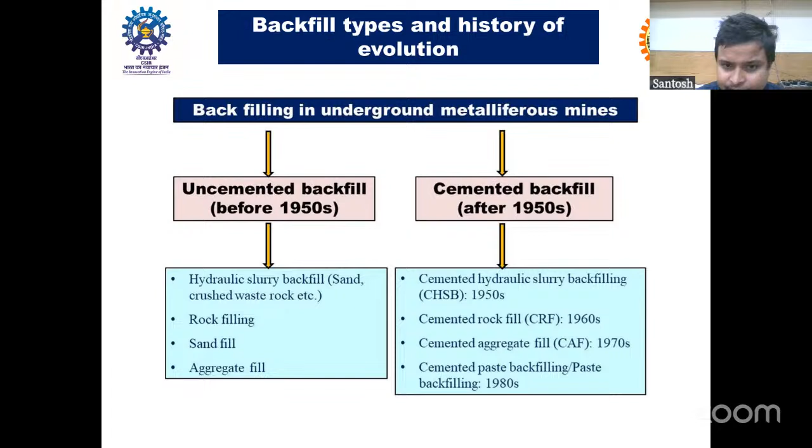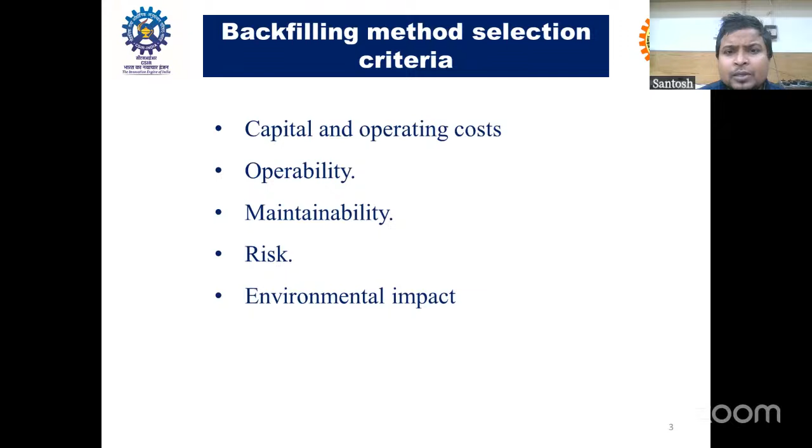So how do we select the best backfilling method for underground metal mining? It depends on the production requirement, what kind of cost the mine owner is going to bear in capital investment and operating cost, the level of operation needed in the underground mine environment, the maintenance, up to what extent they can maintain their best operation, and also the risks associated. The risk means the technical, financial, and environmental risk associated with backfill operation, and then the environmental impact. Considering all those parameters, the best suited backfill method is decided.

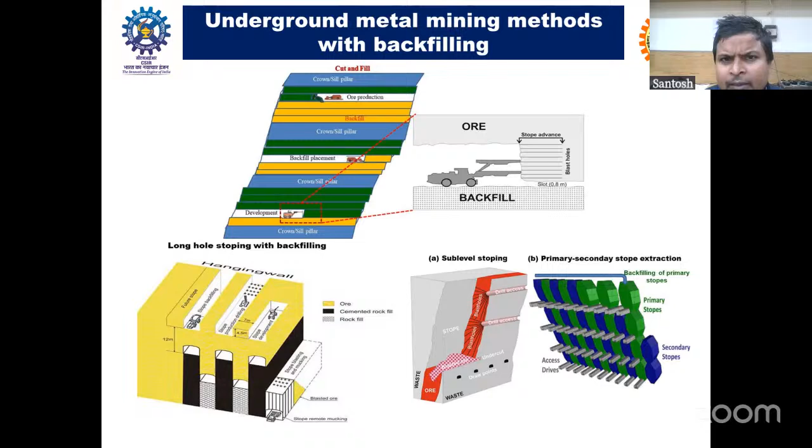And now there are plenty of advancements to completely extract the ore even without leaving any crown pillar. Even the crown pillar is to be replaced with cemented backfill. So this is just about the benefits backfilling provides to the underground mining industry.

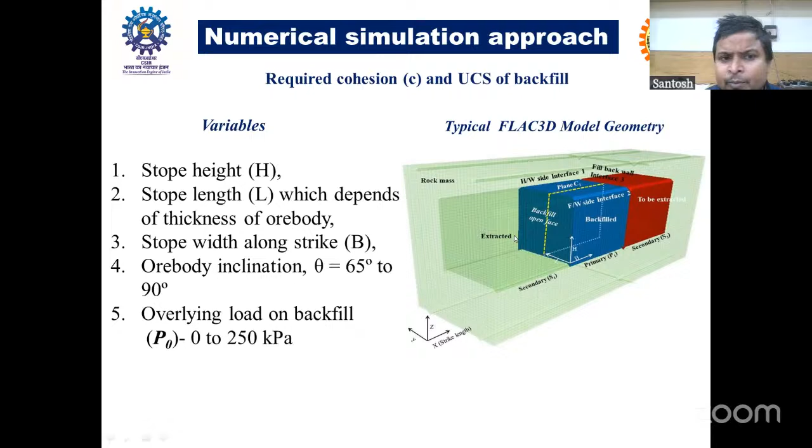So these are the different studies we do to determine the required strength so that the backfill mass remains stable. This is a case for sublevel stoping with paste filling. I will not explain in detail what kind of studies we do. This is just a simple illustration where we use numerical modeling techniques to determine the design strength for the backfill stope. These are the various findings of the numerical modeling. So all those things we do.

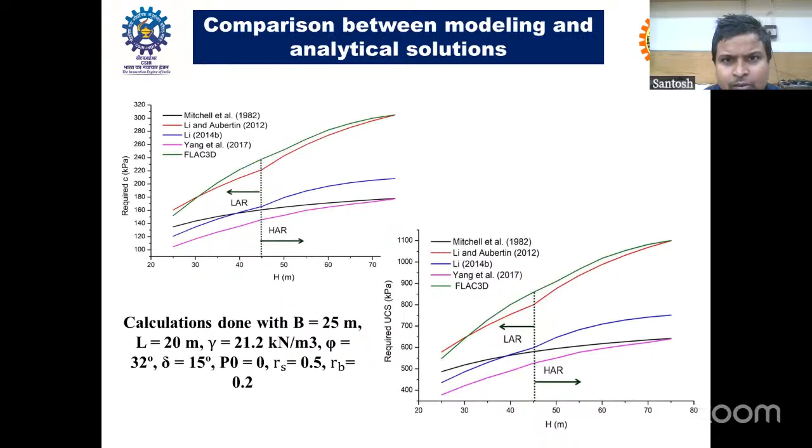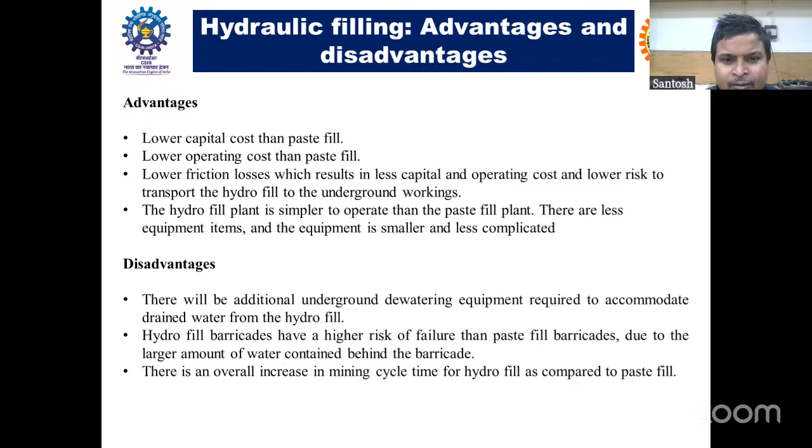And if you ask any mine manager what you need, hydrofill or paste fill, the mine manager will say straight away, I need paste fill, because of all the merits paste fill will provide.

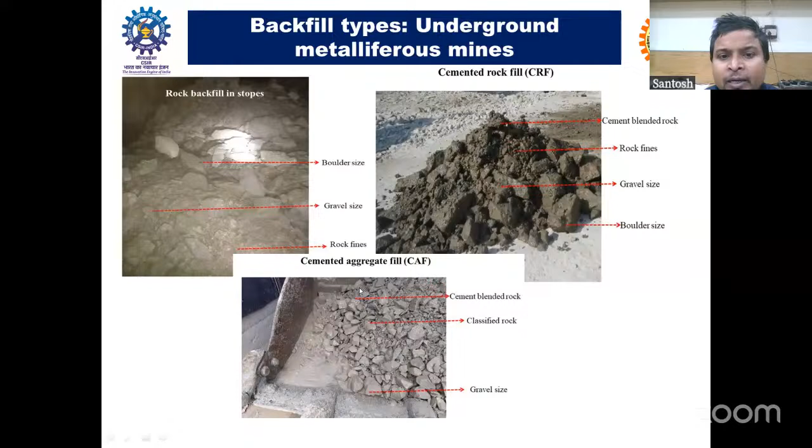At the bottom level it is open, so a barricade, a retaining wall kind of thing, is constructed so that the entire material is contained within the stope and there is no leakage through the barricade. The purpose of the barricade is to retain the whole material within the stope. The height of the stope varies mine to mine; in some mines it may be 25, 30, even 50 meters. It depends upon the site requirement.

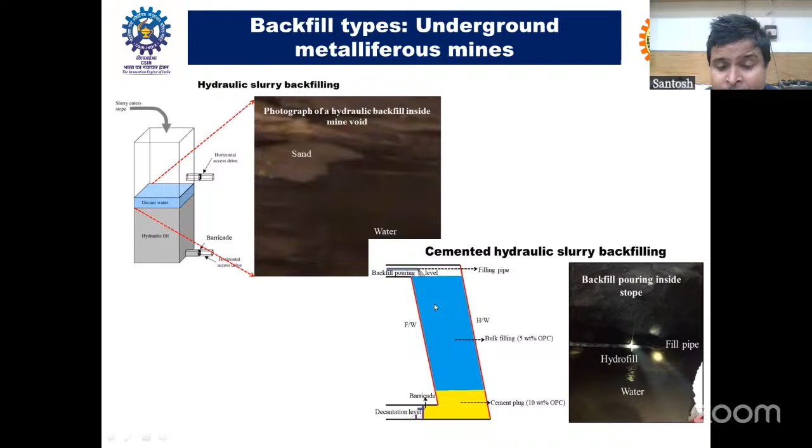Normally, in the bottommost portion, say up to 7-meter height, a backfill plug is constructed. Plug means relatively higher cement backfill mass, and above that, relatively lower cement backfill is poured. The purpose of the plug is to sustain the entire overlying load of the backfill. As it has higher cement content, there is less chance of fill mass failure and leakage through the barricade, even after the barricade fails. Once the backfill plug is properly constructed, the chance of backfill mass failure is negligible.

This is an example of how paste fill is prepared in a paste plant. Normally a surface plant is used for paste preparation. In that plant, classified mill tailings are used, then cement and water are added. Depending upon the requirement and design, the paste is prepared and transported underground through boreholes from surface to underground. From there, using a reticulated pipeline network system, the paste is poured into the stopes as required. This is the overall process of backfilling.

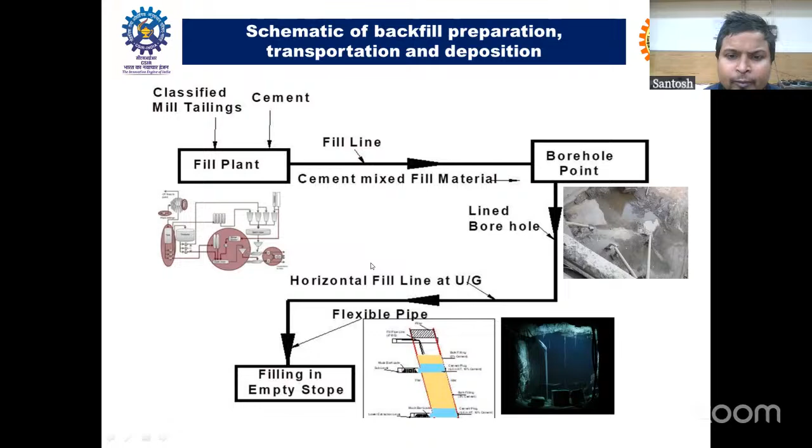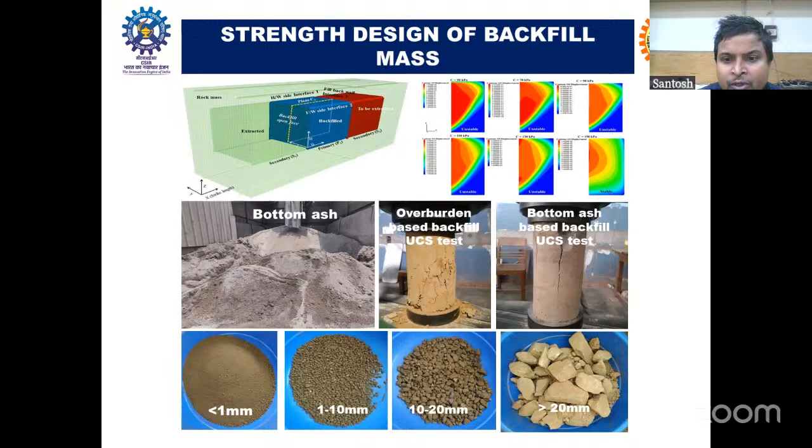These are different studies we use particularly for hydraulic filling or cemented aggregate filling. Different materials are used depending upon the site requirement and availability. Earlier I was showing tailings. Now this is about waste mass and overburden, and classified overburden of different sizes: the finer fraction, less than 10 mm, can be used for hydraulic filling, and the coarser fraction, more than 20 mm, can be used for cemented aggregate filling.

If we are doing hydraulic filling, the main objective is that the material should attain sufficient strength, and at the same time should not remain in slurry form for a long period. Whatever water you add to the underground stopes should come out through the decantation pipes. These are the laboratory setups; we physically simulate those things at lab scale before suggesting any backfill material for hydraulic filling and underground stope filling.

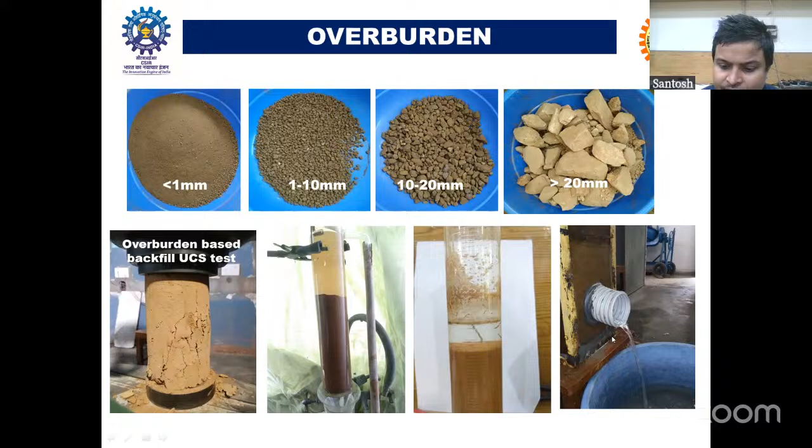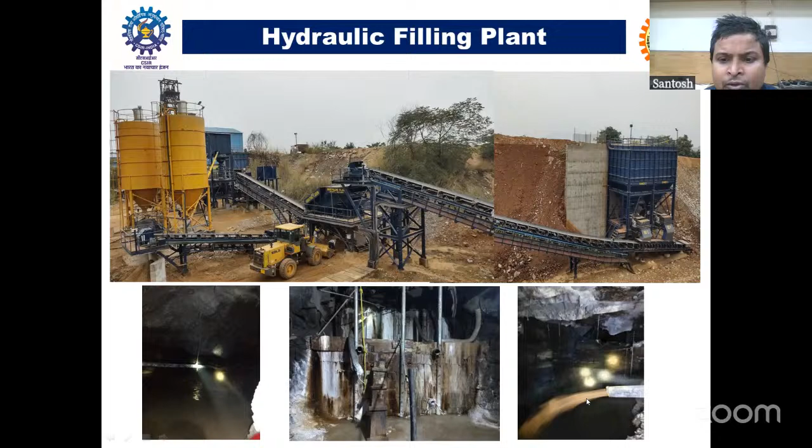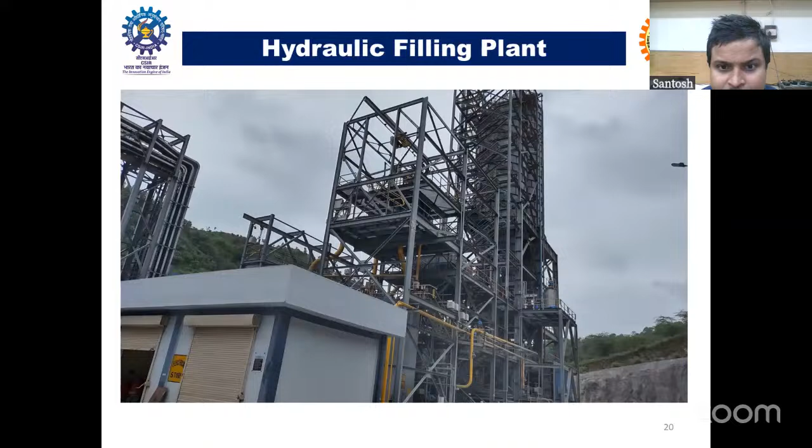This is a hydraulic filling plant of a mine site. At the top you can see the hydraulic filling plant, and at the bottom the backfill barricades and how the pouring is done in the underground stopes. This is one of the most advanced hydrofill plants of Hindustan Zinc Limited, which uses tailings, cement, and water. In this plant, the solid fraction is almost 70%. It's a high concentration hydrofilling plant.

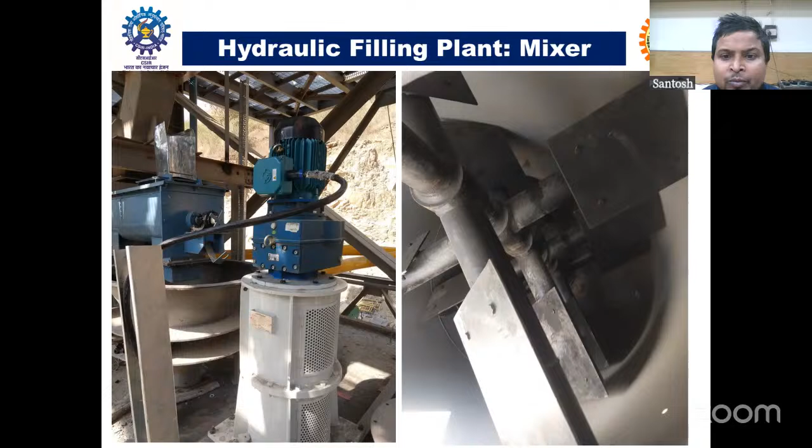There are various components which are used in hydrofill plants. So far as the tailings is concerned, agitators are used in tailings-based hydrofill plants, and the mixer is somewhat like a vertical mixer. In hydraulic plants, the pump is normally a centrifugal pump. This is also one old hydrofill plant of a mine.

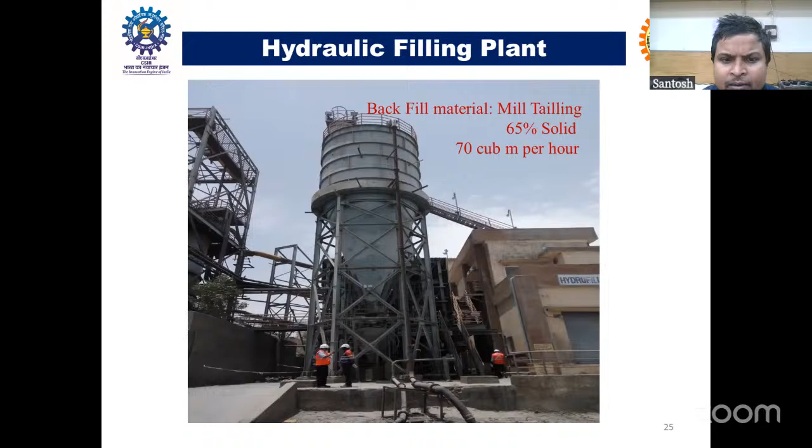As we are talking about hydrofill, the barricade should be properly designed so that the backfill mass is retained within the stope. Various factors need to be considered, like the loading mechanics on the backfill barricade, and the strength of the barricade. Based on the load acting on the barricade, the required strength of the barricade is determined, and the backfill barricade is designed accordingly.

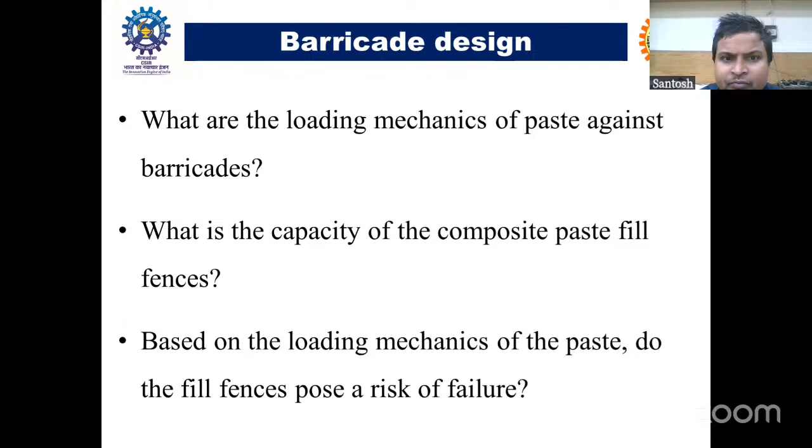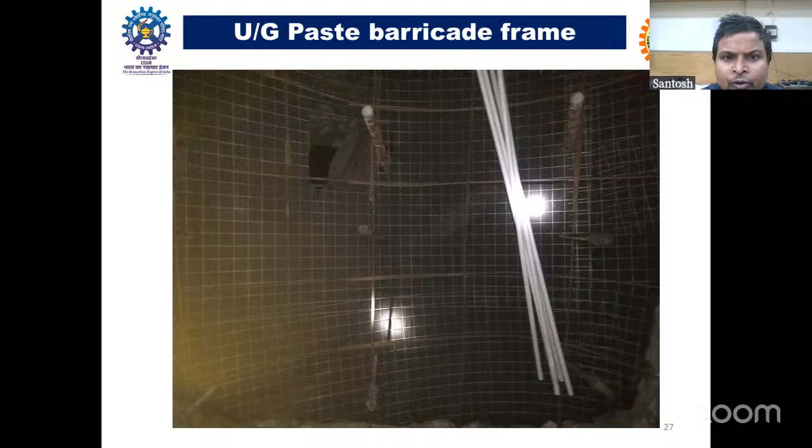So this is a reinforced composite shotcrete backfill barricade construction, which is under construction - just a photograph. There are different backfill barricades that can be constructed, like a shotcrete composite barricade, or simply a brick-based structure, or a wooden structure, depending on the site requirement.

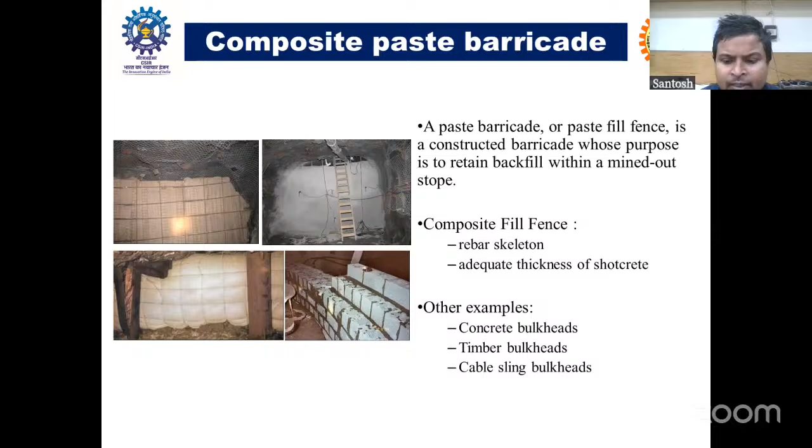What is the benefit of creating a stronger barricade? It means you can increase the fill pouring rate, and continuously pour paste fill or backfill. Also, you can use wider stopes, which means producing more ore at a time, and this definitely adds safety to underground working. You can continuously fill it, and the risk of failure of the barricade is minimized.

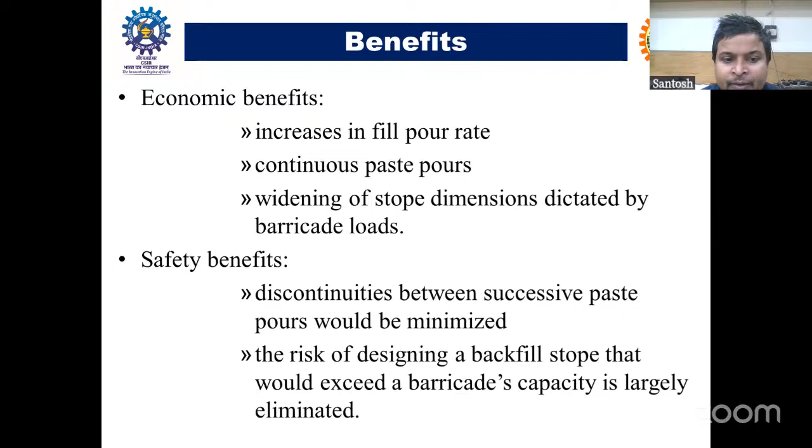This is one more figure of wooden plank barricades. And this is what I was telling about - various decantation pipes, which are erected from the upper level to the lower level, so that whatever water is inside the stope comes out through these decantation pipes, and the water level is minimized in the underground stopes.

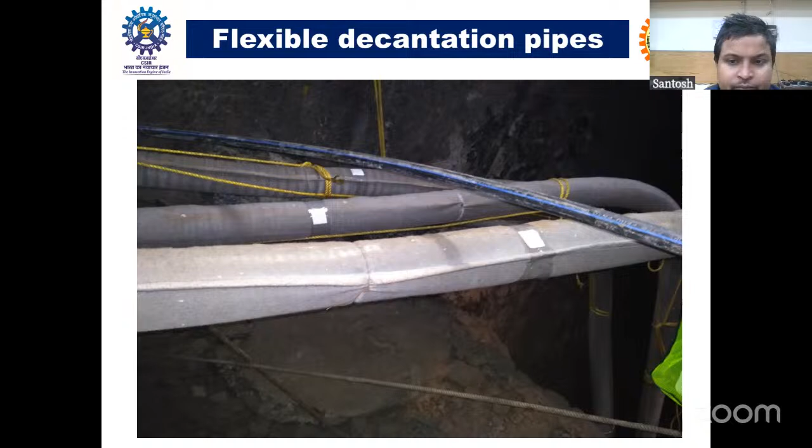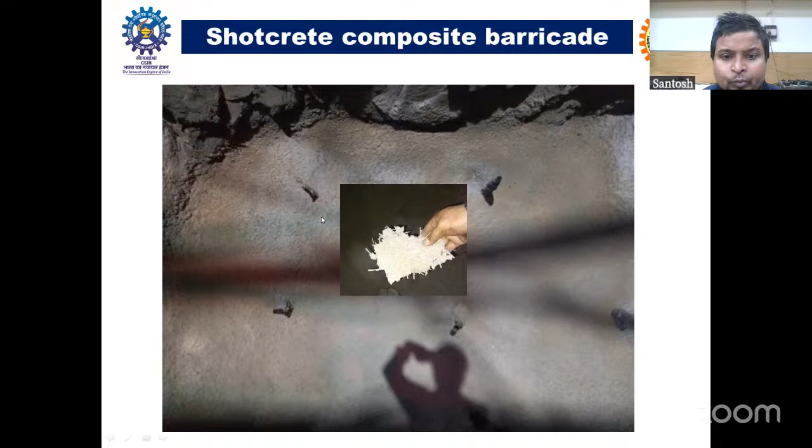This is one photograph of another type of barricade. Earlier, I showed a wooden barricade. Now, this is one of the most advanced barricade constructions, like reinforced double layer, reinforced shotcrete, and also fiber-reinforced shotcrete composite barricade. You can also see many drainage pipes which are kept to drain the additional water present in the stope.

Earlier I was explaining briefly about cemented rock fill, cemented aggregate fill, rock fill, and hydrofill. Now coming to paste fill - if I compare hydrofill and paste fill, paste fill consists of high solid content, whereas hydrofill consists of lower solid content. High solid content in paste fill means up to 80% solid, whereas hydrofill means low solid, maybe up to 50 or 60% solid.

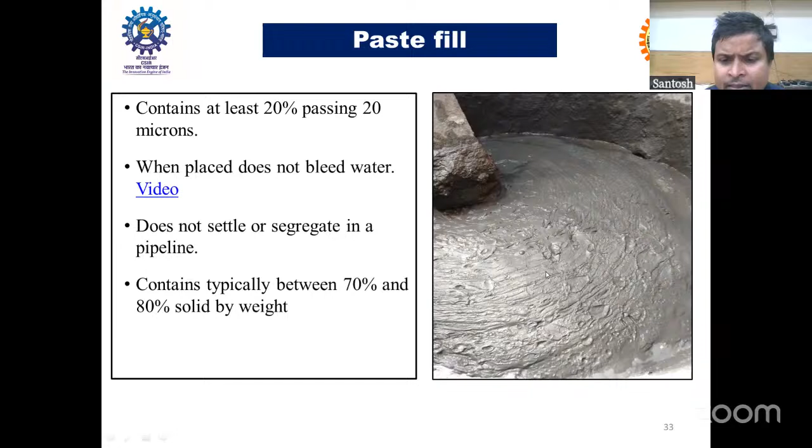Now, why is paste fill required? Though the industry was using hydraulic filling and cemented hydraulic filling, there was a need for industry to improve and increase production, increase safety, and dispose of tailings generated from the mill in a large volume. Considering these issues, and the n number of limitations of hydraulic filling, there was also the requirement that the voids created by stopes need to be backfilled quickly - meaning a high rate of backfilling is required, especially when extracting below important surface features. Considering all those requirements, people started using paste filling.

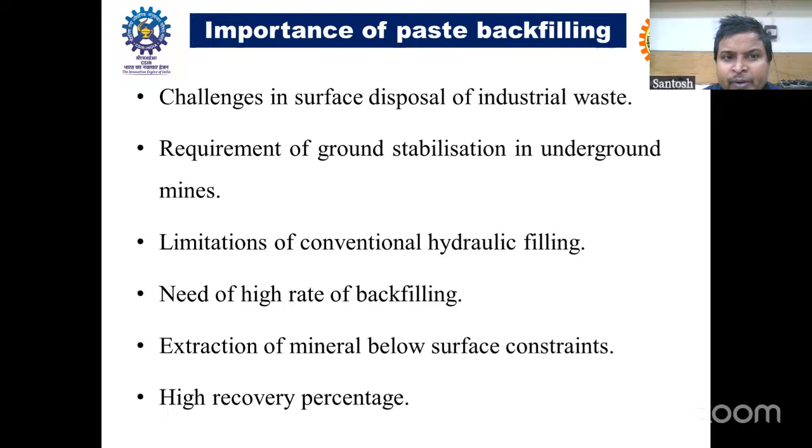The advantages you can quickly see are a minimization in handling additional water, and better quality of fill than hydro-fill. Quality means in terms of strength, in terms of dilution, and also reduction in mining cycle. For example, in hydraulic filling, the entire stope filling process may need say 30 days for filling a single stope. If you're using paste filling, the same stope can be filled within 10 to 15 days. So straightaway you are reducing the mining cycle by 50%. It also prevents possible liquefaction, and paste fill creates less pressure on the backfill barricades.

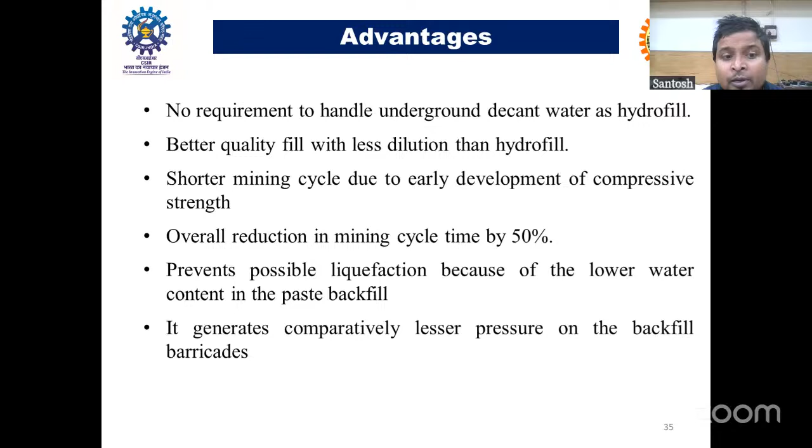So what are the various materials, particularly for underground metal mines, that can be used for paste fill preparation? This is a study we did by mixing mill tailings, fly ash, crushed slag, and cement, along with various laboratory studies we did in CIMFR, including scanning electron microscopy (SEM) study of the tailings, fly ash, and other materials.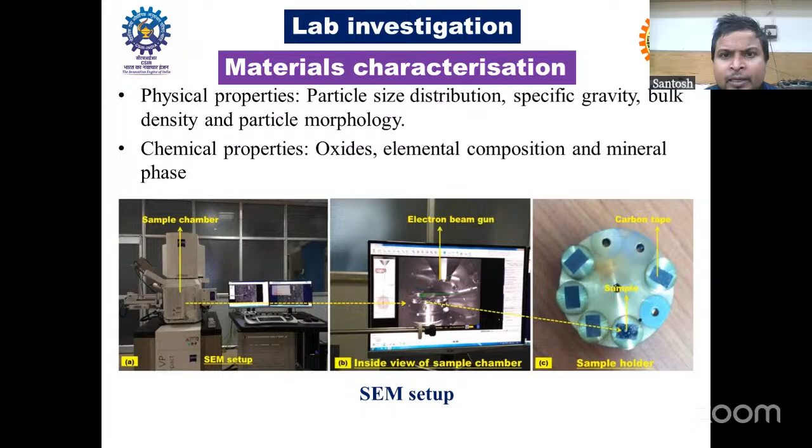So there is a role of chemical composition on the backfill strength. If we have a higher proportion of CaO, SiO2, and MgO and others, the strength is better. Whereas with SO3, a higher proportion may create a negative impact on the strength in the long run.

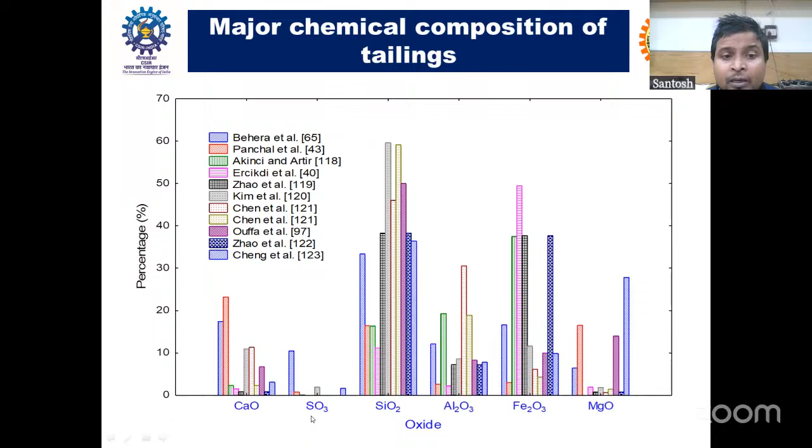There are different studies we do, like comparing hydration index and lime saturation factor. One study we did was for a particular mine that was earlier using cement as a complete binder. Normally in backfilling application, if you simply use cement as the sole binder, you are spending more, and backfilling is itself a costly affair, of which 75% is the binder cost. So the target was to reduce the backfill cost and use alternate binders so that cement can be replaced.

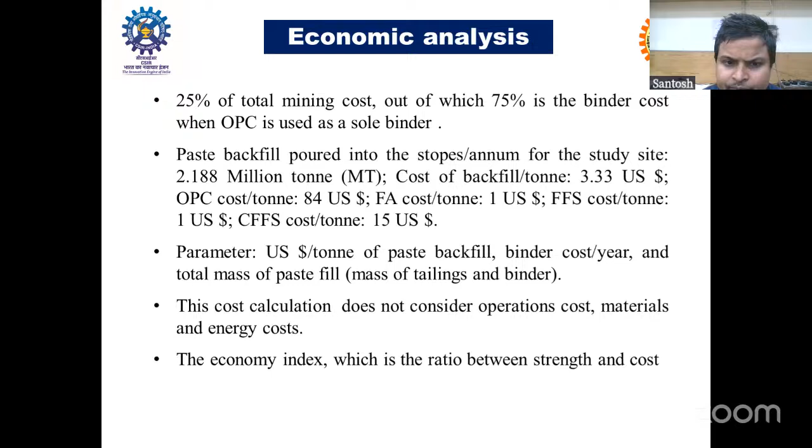Similar to concrete in civil engineering, people are using alternate binders like GGBFS, fly ash, and other natural and artificial pozzolana. The same applies to paste fill. We found that when replacing cement by just 1 to 2%, we are saving crores of rupees on an annual basis. This is one of that study.

Imagine that a strong backfill structure has been created underground. Unless you create a strong backfill structure, you cannot extract a core from that backfill mass. So if you are able to extract a core, that means the backfill mass has attained sufficient strength. The purpose of this core extraction is to determine the strength parameters of the cured backfill in the underground environment. This is one kind of study we have done for many mines.

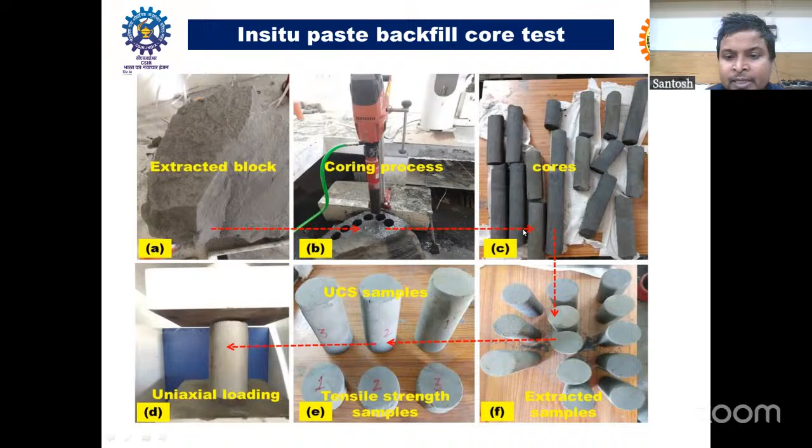Here is another part where we have extracted a block of backfill mass - this is a backfill block, not a rock. In the lab we extracted cores, and you can see the cores. It looks like rock cores, but it's actually cured paste fill cores. We then determine various properties like UCS, tensile strength, Young's modulus, and Poisson's ratio.

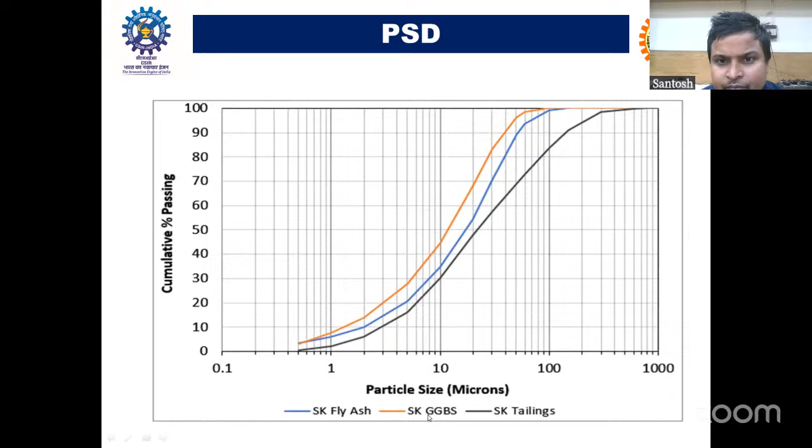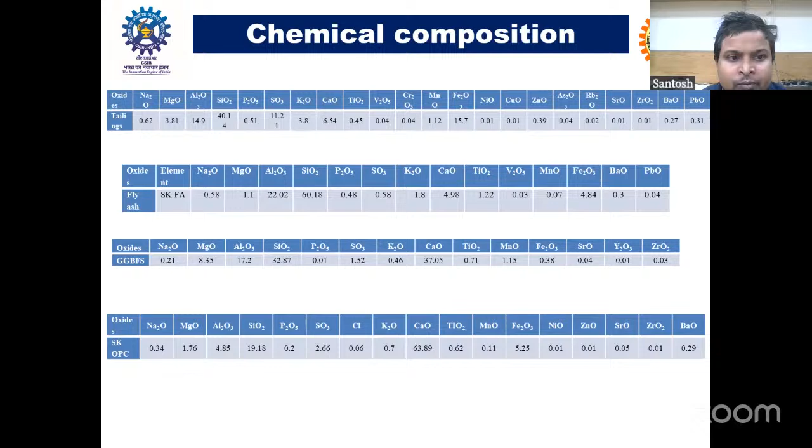There is one more study we did, replacing cement with fly ash and GGBFS (ground granulated blast furnace slag). These are the various properties of the material used, like tailings, fly ash, and GGBFS.

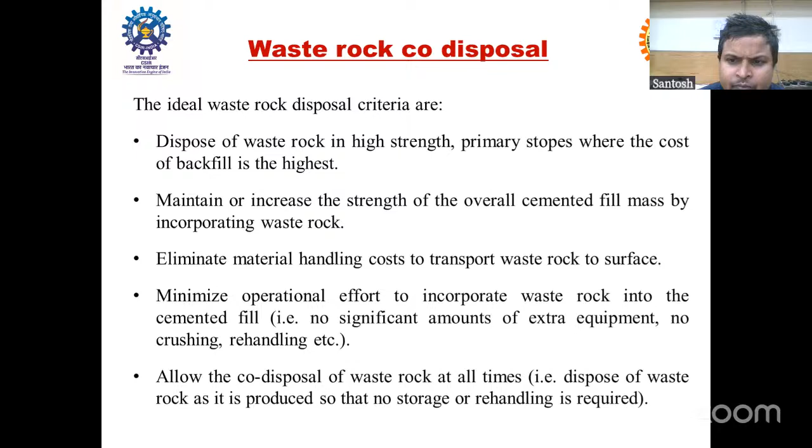One more recent development is people thinking about using paste fill in conjunction with waste rock in a single stope. This is another part we are working on - how best both things can be accommodated in a single stope, paste fill and waste rock at the same time. This can be done for some portion of the mine, not at a complete level. This is all about waste rock co disposal.

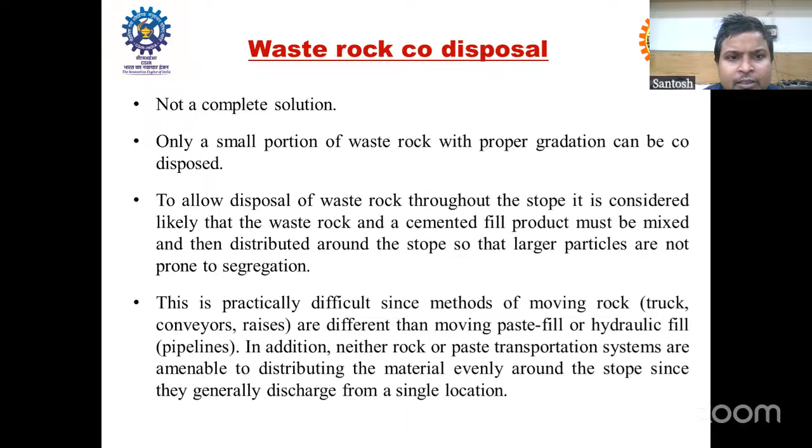Okay, I have just quickly gone through because I have completed my slides. I will summarize whatever I have explained. Quickly, I have explained different underground backfilling methods which are being used. All these methods are used in India and in various underground mines of Hindustan Zinc Limited, Indian Metal and Ferroalloys, Hindustan Copper, Uranium Corporation of India Limited (UCIL), then MOIL.

And also Indian Metal and Ferroalloys, as I already told, and Odisha Mining Corporation, people will be using paste fill. So I have summarized different methods of backfilling, starting from uncemented to cemented backfilling, and also in the cemented backfilling category we have different options like cemented rock fill, cemented aggregate fill, cemented hydraulic fill, and paste fill. I have also differentiated rock fill, CRF (cemented rock fill), and cemented aggregate fill.

Then I quickly explained the process for doing cemented hydraulic filling and the merits and demerits of cemented hydraulic filling. Then I quickly explained the benefits of using paste fill over cemented hydraulic filling, and a few studies on paste fill and how tailings can be used for paste filling purpose, and how the cost of paste fill can be reduced by using alternative binders, replacement of cements.

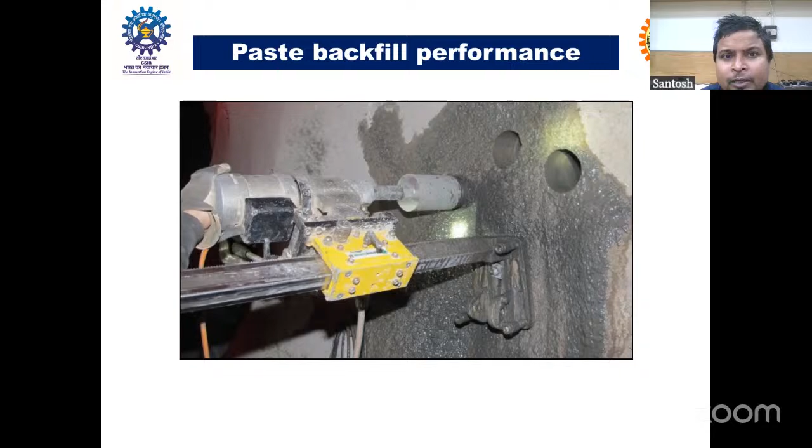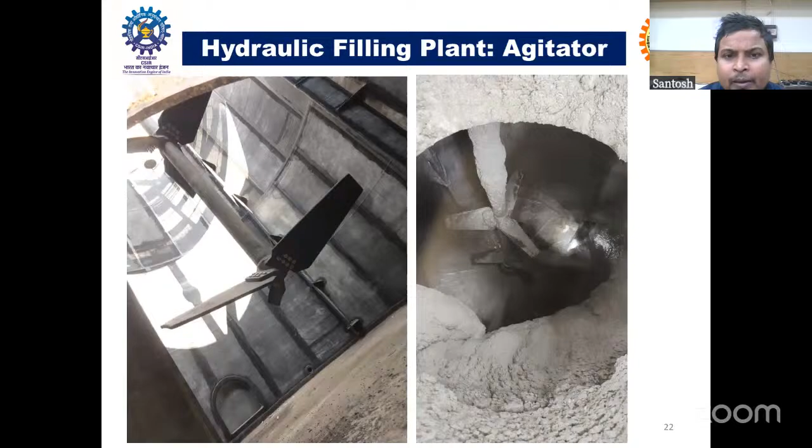If anybody has any doubt or needs any clarification in detail, they can ask me here, or even call me or mail me - I have my email ID. This is all from my side. Hope I have not consumed much time; whatever time was assigned to me, I have finished within that time.

Any questions from the audience, sir, please?

Sir, in the chat there was a question: what are all the job opportunities available to students who are opting for mining related engineering courses? Yes, actually I was also guessing there might not be many listeners who are from a mining background.

Anyhow, mining related - if anyone is doing diploma in mining or BTech mining or BE mining, say for example if someone is doing BTech mining from any university, whether private or government, the mining industry needs mining engineers for different operations. It is categorized into two parts: one is underground, and the other is open cast. So there is plenty of scope for jobs in mining.